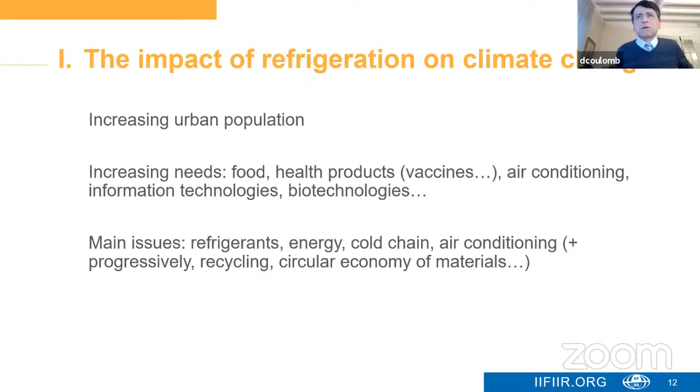What's the refrigerant issue? Well, you certainly know that the refrigerant issue, when there are leakages of various fluorinated gases, represents 2.9% according to our estimations of global CO2 equivalent emissions. As you know, HCFCs will be phased out. HFCs will be phased down in the future. HCFCs in 2030 for developing countries. It is already the case in developed countries. HFCs until 2045. Many measures are already taken. And thanks to the Kigali Amendment, we are already moving in the right direction. As you know, we have serious steps, 2030, 2050, in order to obtain carbon neutrality in the middle of the century. And the actions in refrigeration are, we can consider, on time for that.

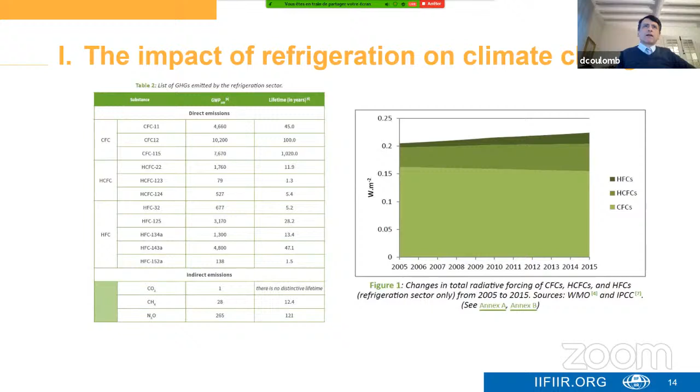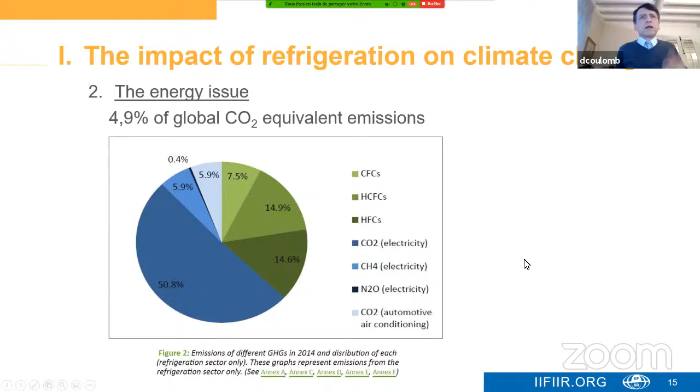The second main issue is the energy issue. It is more important than the refrigerants issue. It represents about 4.9% of global CO2 equivalent emissions for all the refrigeration uses, including air conditioning, for instance. Here you have a presentation of the various kinds of greenhouse gas emissions due to the refrigeration sector only. And as you see, most of them are due to electricity with CO2, methane, and N2O, and CO2. And then CFCs, HCFCs, HFCs.

Well, however, even if it is the main issue, it can be very different from country to country depending on the energy mix. However, in any case, at an international level, refrigeration represents about 20% of global electricity consumption. And as this proportion is increasing, the impact on energy infrastructure is in any case huge and must be contained, even if we have more renewable energy.

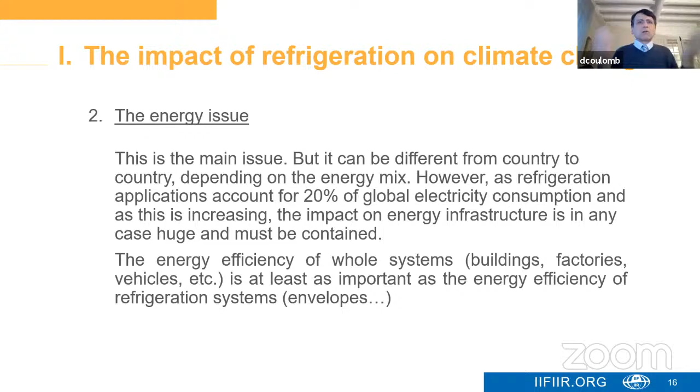And the energy efficiency of the whole systems, such as buildings, factories, vehicles, is at least as important as the energy efficiency of refrigeration systems. Because envelopes, for instance insulation, are very important, and we cannot only take into account the energy efficiency of refrigeration systems, but think about the whole systems.

And also, I would like to remind you that we have increasing needs. A reliable cold chain is necessary for food safety and health. And for instance, according to the WHO, about 40% of the world's vaccines are unusable due to a lack of such a chain. As I told you before, it is still an issue for the current vaccines because of COVID-19. The world population will increase by 2 billion by 2050, taking into account that we already have about 800 million people undernourished, and the elimination of food losses and waste could feed up to 950 million people, according to our estimations.

Moreover, environmental consequences of food waste outweigh the environmental consequences of the current cold chain. Refrigeration can have a positive impact on the environment. I would like also to insist on the fact that we also need air conditioning. It is a tool for adapting to global warming, and in any case, it will increase.

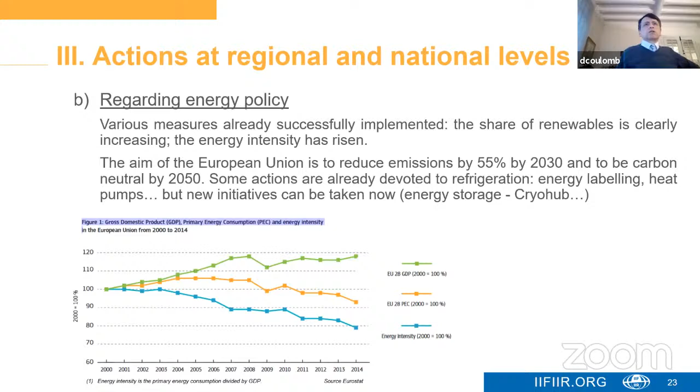We will have a revision in 2021 with possibly stronger constraints, and in any case, with complements after the 2030 deadline. And we also have some training of technicians which is encouraged, and we are also working with them on that. Regarding energy policy, we have increasing energy efficiency, and some actions are already devoted to refrigeration. I mentioned, for instance, an action we have on energy storage with the European Union, CryoHub. Also, you have the graphics. Food waste also is important, and progressively, there will certainly be some new obligations regarding food waste, even if it is less than in developing countries.

Other developed countries have achieved phase out of HCFCs, and phase down of HFCs has already started. It is important to understand that changes to standards and regulations now facilitate the use of flammable refrigerants, which will replace high GWP HFCs.

Currently, policies concerning energy consumption are various and complicated, but this will certainly evolve in the near future. Regarding developing countries, this is certainly the main issue.

Some large emerging countries such as China and India are implementing actions concerning the promotion of low global warming potential refrigerants, such as hydrocarbons, and renewable energies. But much remains to be done, and moreover, the strategies of most developing countries are still unclear. Also, the needs in these developing countries are increasing.

So my conclusion is that we have major challenges for the next decades: the increase of refrigerant equipment, the phase down of HFCs, energy consumption, and food losses.

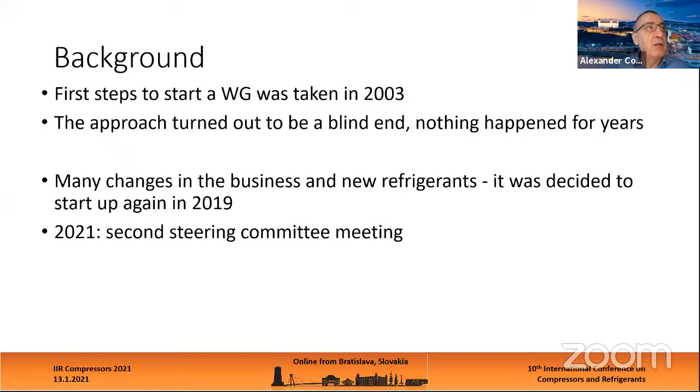The first steps—I can see my slides, here it comes—the first steps were taken back in 2003, but due to different things it didn't really happen, and it didn't really get off the ground. So after a lot of push and force, we got back in business in 2019, and we tried to start up, and we are expecting a second steering meeting here in the beginning of this year.

Why do we have to have a working group on safety? It's because we are having a lot of new working fluids, and they present a lot of different topics that we need to be aware of, such as toxicity.

There is breakdown products in the systems, and there is other things that we need to consider. There is new systems. For example, you can take the new CO2 systems, which is actually not so new anymore. And then there is, for example, water vapor or air cycles. They are also new, and we need to know about this.

One of my points I want to make is that it's important that the technicians working in these fields need a lot of training to be up to speed with the development. Because if we look at the IEA, they say that 30% of the measures we need to take to reach the 2050 goals is energy efficiency gains. 30% of energy we have to cut away just by increasing efficiency. That's a lot, ladies and gentlemen.

And then there's a whole set of new temperature regimes. When we are coming over 120 degrees in supply temperature, there is a lot of regulations we have never been used to work with. But if you look into steam preparation with boilers, there are a lot of rules, and we have to comply with some of these rules as well, because we are also in pressurized water. May I remind you that steam is also very dangerous, although it's water.

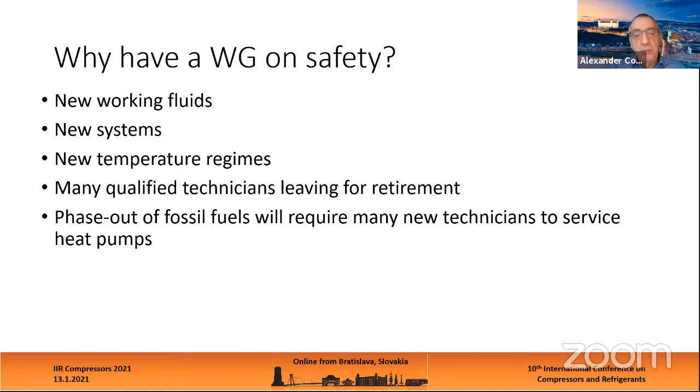Another challenge we have is that a lot of qualified and certified technicians are leaving the industry these years for retirement, and we don't get enough new young forces into the labor force. So we are in a very difficult situation. I heard at a webinar from the UK that they have around 1,000 refrigeration technicians and 120,000 working on boilers. If we are to phase out fossil fuels and exchange them with heat pumps, then you have the magnitude of people we need, and we are far behind already. So this is a big issue.

When we look at the working fluids, they are classified, as you know, in the ASHRAE classification system, and we have different groups. I saw yesterday a paper, from 2019, that some of these 2Ls are actually as dangerous or flammable as, for example, ammonia. So there's a lot of things we need to learn to do, and we have to be very careful.

Another thing I will come back to a little bit later is illegal working fluids entering the market. And that is also a very dangerous topic because some of them contain flammable gases or even self-igniting gases such as R40 or methyl chloride. And this is a very difficult thing.

A lot of the low GWP gases are flammable depending on how you test them. You can of course test them so they are not flammable, but in reality they are. So be careful.

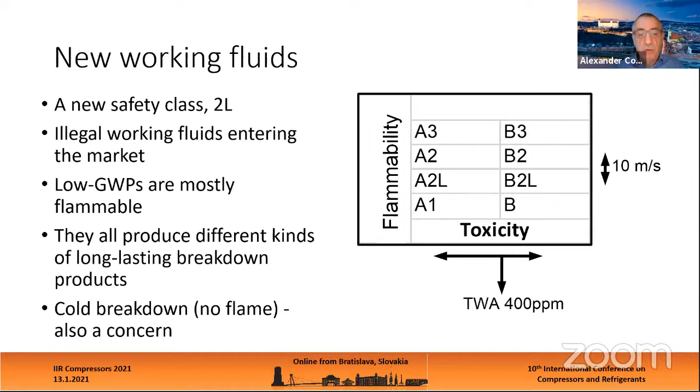And there's also a lot of new long-lasting breakdown products which will also put a new strain on our system. We have the ODP as a measure, we have the GWP as a measure, but perhaps we also need to look at PFAS in the long term. We need to find out how to do this. And remember that some of the gases, or all gases, break down also without flame, meaning when they are exposed to ultraviolet light, or just heat from the room. So it is not so easy to just say that they are safe and not toxic.

May I remind you that there is a lot of push for lower GWP, and it is coming from the EU regulation 517/2014, the F-gas directive, if you want, and the quota system, where the interest or the driver is to get to the lower, because then you can still sell more refrigerants. If you have a high GWP refrigerant, you can sell less because your quotas are given in CO2 equivalents. But this is another issue that we don't need to talk about here, but it gives you a picture of what is pushing.

The workforce in the market needs to phase down traditional working fluids, for example R134A and R404A, and finally we also see new refrigerants such as CO2 transcritical systems, which are becoming part of the new future systems. And also we see a lot of chillers using both A2L and A3 working fluids, which requires new certificates or training levels for the people working on the system.

Also, the new temperature regimes, as I mentioned in the beginning, with higher temperatures, give new challenges. If we go over 120 degrees, for example, you need a special certificate for welding on the pipes. On the secondary side, even when we go up to about 180 degrees, there will be another problem with the lubricants as we see them today.

And we also need to move to very high temperatures, seen with our spectacles today, because the EU foresees heat pumps going up to about 250 or even 300 degrees, to phase out at least some parts of the boiler market, while other parts of the boiler market will be serviced with hydrogen in the future.

It has to start now, because a lot of the equipment put in now will sit in place for the next 50 years, and that is a long time out into the future. We will not be able to meet the 2050 goals if we wait until 2030 to do something, because of the longevity of the systems. So it's very important that we see this coming, and that requires a lot of skills from contractors, from technicians, from service technicians, but we also need to employ people who can work on the water side in the refrigeration business. Therefore, it is a very demanding future we are looking into.

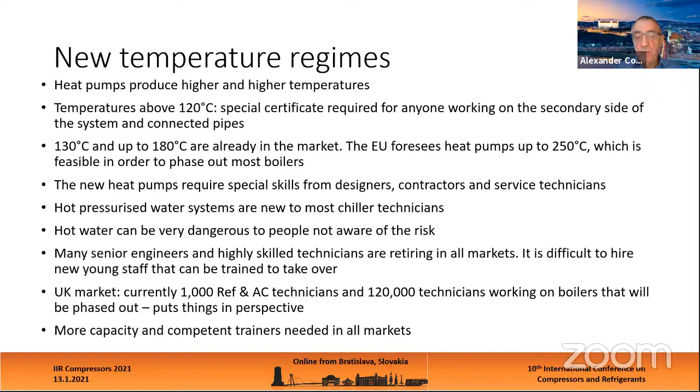A couple of years ago there was an accident in Canada where the main issue was that the contractor had warned the owner that they had to exchange the heat exchanger, but they didn't do it. They put it into the budgets for two years, and then it fell out again. After 7 years, after the first warnings and continued warnings, the thing exploded and 3 people were killed. One of the lessons was that the owner had not followed the warning, and therefore he was found guilty, and it became expensive for them because they had to pay.

But it is very important that we don't only blame the contractor. We have to be very observant of the owners also. They have to have an obligation to know what it is that they are buying, so they're not just holding up their hands and saying, 'I know nothing and I'm innocent.' That doesn't work anymore, and this is the future. We have to try to push this knowledge.

Another sad story we heard just before Christmas, which we have not fully understood, but from a quick reading, translation, and explanations from the local field, it looks very much like an accident involving illegal refrigerants, where there has been R40, or methyl chloride, which exploded and killed a service technician. This is one of the things we will look into more in the working group.

The trouble is that it is very difficult to detect just by measuring pressure and temperature. You have to simply take a test of the refrigerant, and it's not so easy. But this was in December 2020, so it is not so long ago.

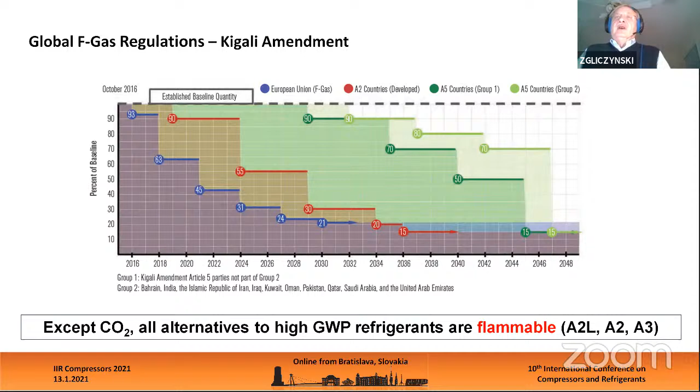So the charge limits in refrigeration are basically defined by two types of standards. There are so-called general standards and product standards. At the international level, there are two organizations taking care of those standards. One is ISO, developing the general standard, as Alexander mentioned, ISO 5149. And in the product standard field, there's the International Electrotechnical Commission, where my committee is taking care of the 60335 series standards: -2-24 is for household refrigeration, and -2-89 for commercial refrigeration. And this will be the main subject of my speech today.

Each region or country has its own organization taking care of standardization. For example, in Europe, we have CEN taking care of general standards, and CENELEC for electrotechnical standards, producing equivalent standards to the global IEC standards. In the US, we have ASHRAE covering the general standard with the ASHRAE 15 committee, and UL developing the so-called product standards for the industry. In Japan, the equivalent organizations are METI for general standards, and the Japanese Industrial Standards for product standards. And the same is happening in Australia and New Zealand.

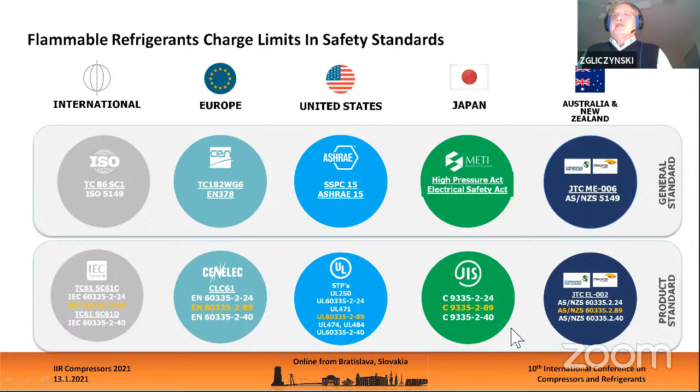So as I mentioned, there are two different levels of standards: the general standard, which is much broader, and product standards. Product standards are mainly used by manufacturers of equipment, because a product standard basically contains a basic risk assessment inside its requirements. In the general standard, not all the hazards are covered, so safety depends on the location and on who is present in the specific place. It is mostly for installations. It's not so much for products produced in big numbers, where the manufacturer does not know where the product will be applied, except obviously the instructions indicating what to do.

Second thing, the standards are normally just a suggestion. Only the national authorities can require compliance with the standard by their local, national or regional laws.

And there is a rule of precedence that is written in all the general standards: if there is a product standard covering a certain subject, it has to be used in preference to the general standard. So if you have a cabinet that is, let me say, going to the supermarket, there is a product standard covering it, so you have to apply this product standard.

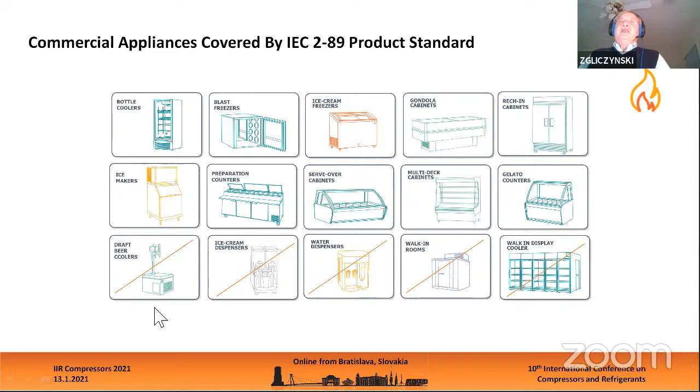And in addition, the scope was enlarged to ice makers. So ice makers are now covered by this new -89 standard. Some systems are not covered by the 89 standard because they are excluded from the scope, like walk-in rooms or, let me say, walk-in display cabinets, or food dispensing equipment. They are covered by the 75 standard of this 335 series.

With this new standard, the maximum charge level was increased from 150 grams to 13 times LFL. What does 13 times LFL mean? LFL is the lower flammability limit, and here you can see as an example, in the case of propane, 13 times LFL is almost 500 grams, or half a kilo, as a maximum quantity. In the case of R32, for example, this A2L safety class, even if the formula gives almost 4 kilos, an international committee decided that 1.2 is enough because it can provide the same cooling effect as half a kilo of propane.

This limitation is still under discussion. Probably in the next revision of the standard, this limit will change. Important to say that for systems below 150 grams, the requirements are the same, so you have no additional requirements for systems under 150 grams. The new requirements are basically only related to systems above 150 grams. As I said, ice makers are covered, and remote systems are excluded for the moment from the scope. And this is something else that will probably change in the near future.

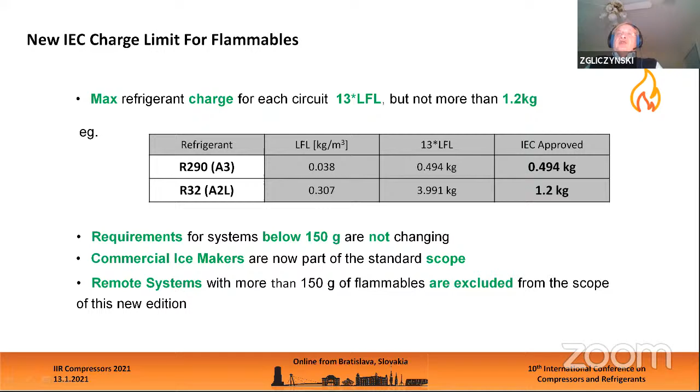So here is a list of new requirements for systems with a charge above 150 grams. The system has to be hermetically sealed, protected, and not accessible to avoid damage, cannot cause vibration or resonances, and has to be marked with the new symbol on the appliance that will avoid placing the equipment in a room that is too small, which can cause stratification of the refrigerant in case of a leak.

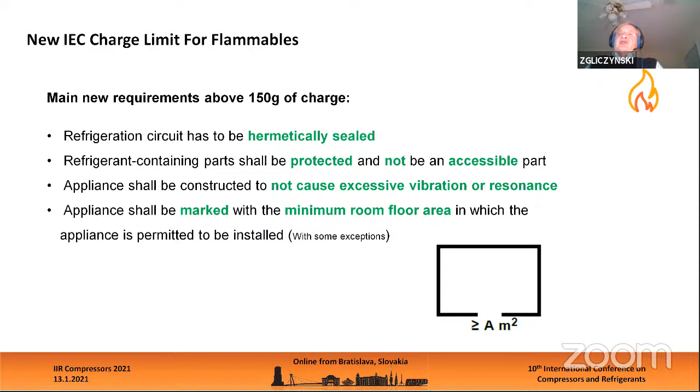But the most important point to assure the safety of systems with higher charge is to minimize the risk of creating a flammable refrigerant concentration around the appliance in case of a leak. And this concentration can be avoided basically by using airflow. It's not really mandatory to use a fan, because if the system is placed on the top of the appliance, a fan may not be necessary, but in most cases the appliance itself has to provide enough airflow to minimize this risk of flammable concentration around the appliance, because you can imagine a new appliance with higher charge surrounded by systems that have potential ignition sources.

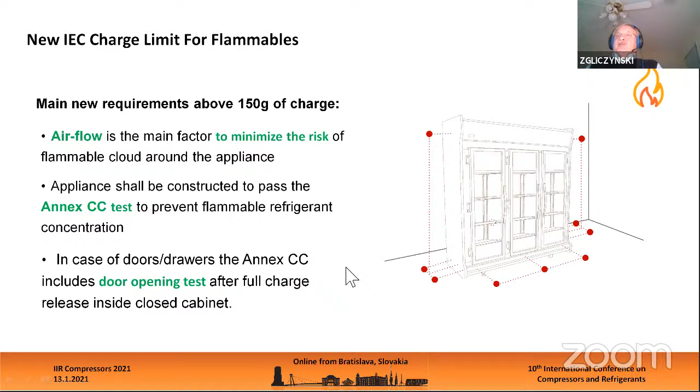So the most important thing is to prevent the risk of creating a flammable cloud in the surroundings of the appliance. And there's an Annex CC in the standard that is designed to test each appliance in this regard. One of the most difficult tests is the door opening. Imagine you have the release of all the charge inside a cabinet with doors, and then suddenly you open the door. You can see much more easily the high concentration in the surroundings. So this is probably the most difficult test to pass. Maybe some applications with 500 grams with doors will not pass this kind of test, or the manufacturer will create a special airflow to mitigate this risk.

Now, as you know, the IEC standard is, let me say, a suggestion for all the world. It is the starting point. So this new edition with the higher charge limit was adopted in many countries that have their own standardization system, but in the regions where there is strong local or regional standardization, the process is still ongoing.

So first of all, in Europe, this new EN version of the standard has to become a harmonized standard with the machine directive, and this is quite delayed because of alignment with the directive. So the last date I got from the CENELEC Technical Committee 61 is the target date for the final vote, probably in October, November 21.

In the US, the equivalent proposal was already developed by working group 12 of CANENA, I'm part of this committee as well, and this is going into the comment period at this moment, and the publication is expected still this year for the US and Canada. New Zealand and Australia were the quickest to approve it in their local standardization system, and this was done in July last year.

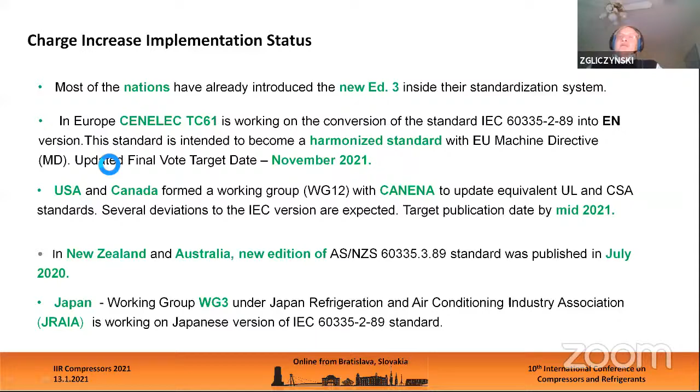There are two questions. Can we expect increasing allowable charges for propane or HFCs also in air conditioning and heat pumps? For example, cap limit M1 from 1.8. For example, I think it means refrigerant R32, 1.8 up to 2.5 kilograms.

Yeah. This is important. What I was explaining today is the product standard. Today, in air conditioning and heat pumps, there is another standard, IEC 60335-2-40, that already allows a much larger charge of flammable refrigerants. So, for example, propane, in certain situations, even more than 1 kilo. In the case of air conditioning with A2L refrigerant, this limit is even larger. So if you go to the specific air conditioning heat pumps, the limits are already much higher than we have in commercial refrigeration.